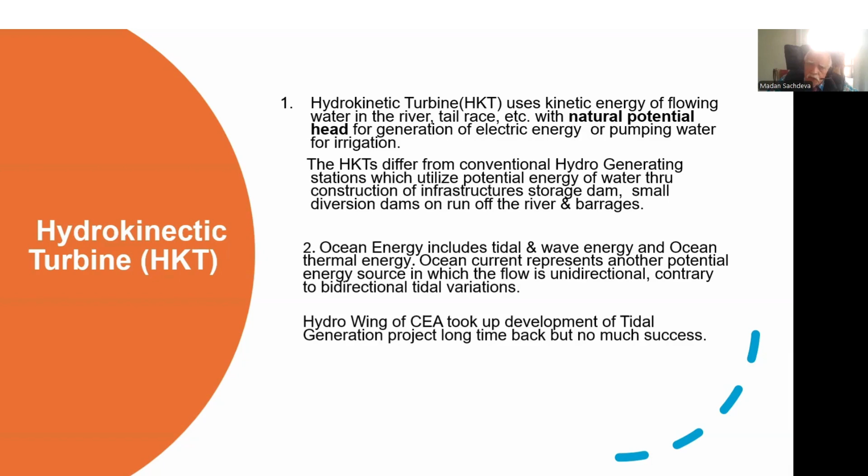Ocean energy includes tidal, wave energy and ocean thermal energy. Ocean current represents another potential energy source in which the flow is unidirectional, contrary to bidirectional tidal variation. The hydro wing of CEA took up development of a tidal generating project long back, but with no success.

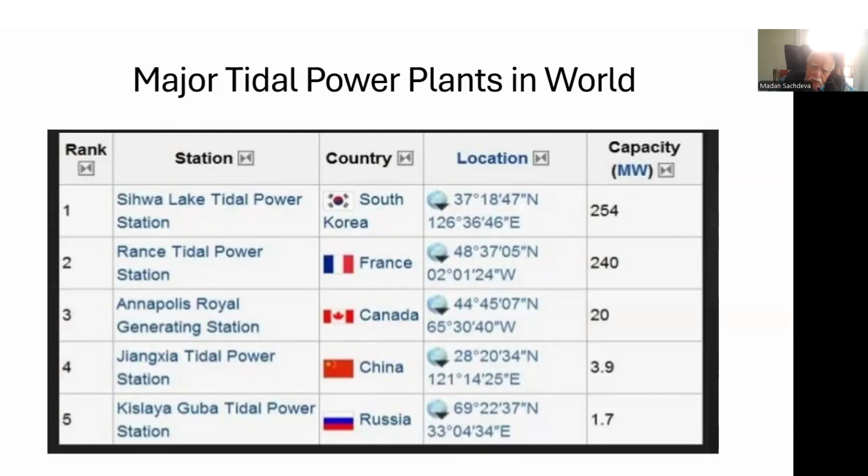This table shows the major tidal power plants in the world which are in operation. In South Korea, the capacity is 254 megawatt. In France, it is 240 megawatt. In Canada, it's 20 megawatt. In China, it's 3.9 megawatt. And Russia is 1.7 megawatt. There are many other cases, and now UK is trying to build the biggest tidal station for power in their islands.

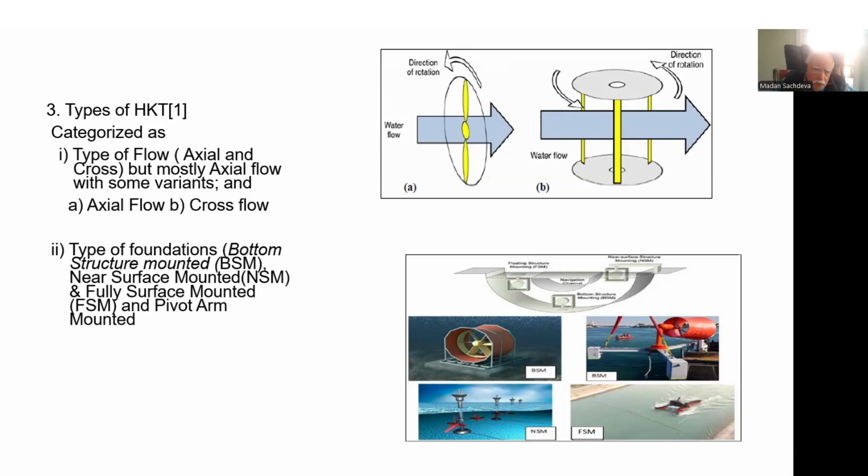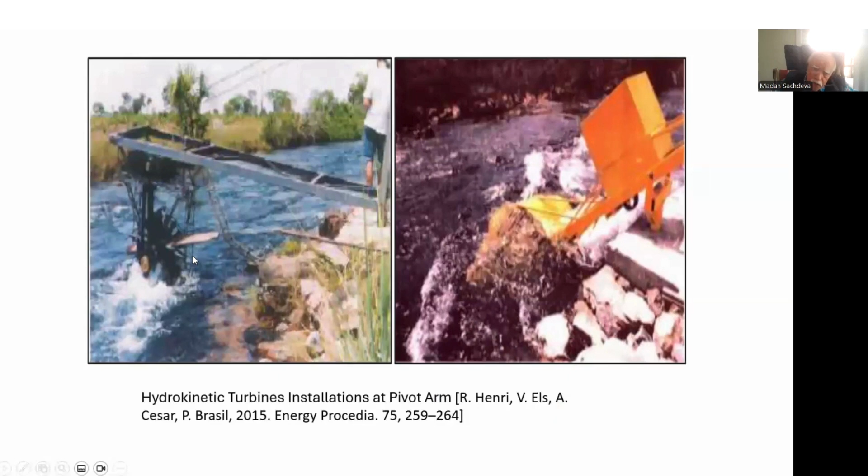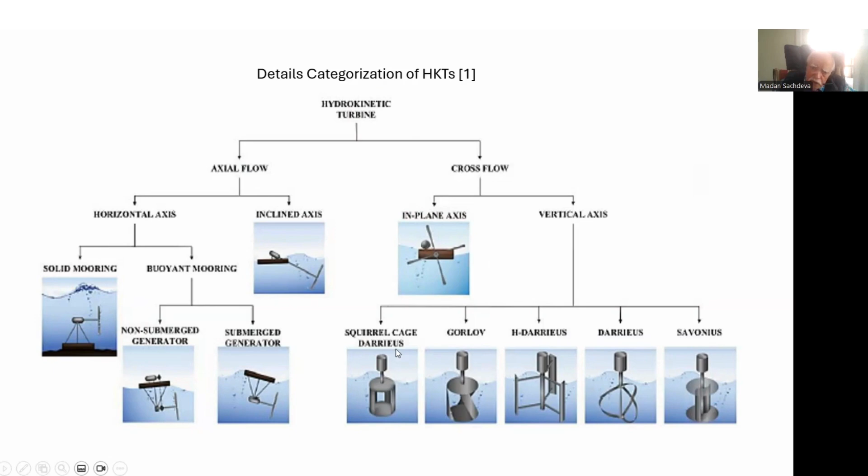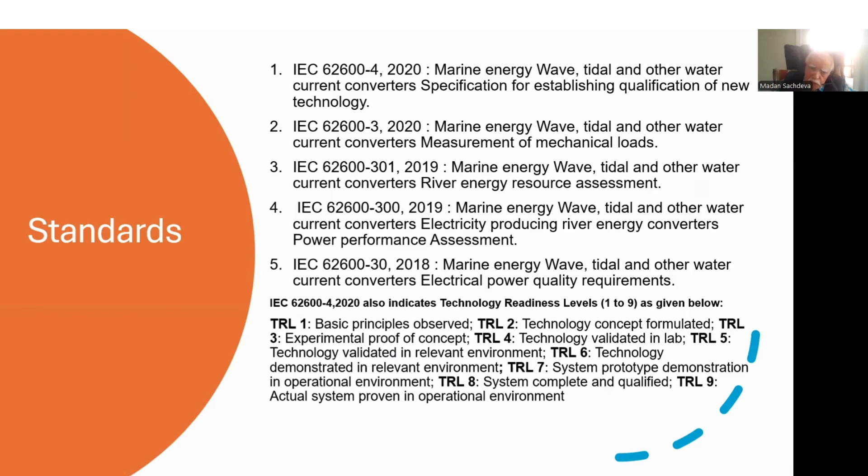Standards ruling the HKTS. There are 5 IEC standards, and one of them, IEC 62600-4 of 2020, in addition to specific requirements of the HKTS, also indicates the status of its present situation. The categorization is given from 1 to 9. 1 indicates basic principle observed, 8 indicates system complete and qualified, and 9 indicates actual system proven in the operational environment.

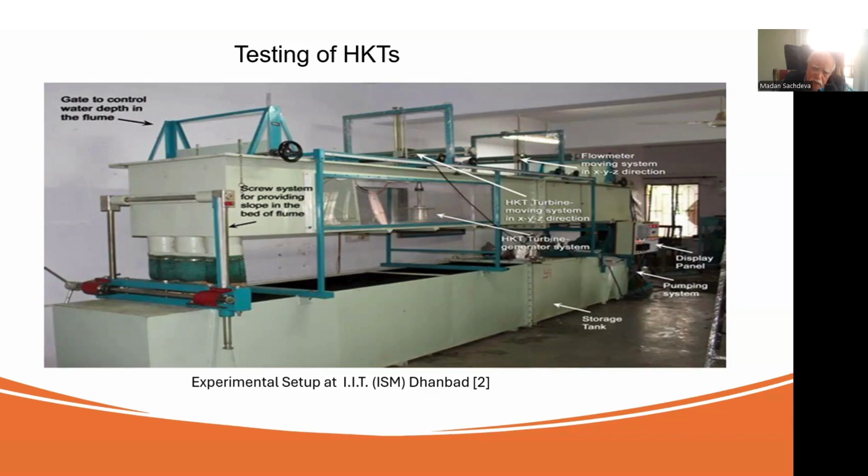This figure shows the testing of HKTS. This is an experimental setup in IIT Dhanbad. The reference is from the IIT International Conference conducted in 2019. On the left of the figure you see gates to control water depth and volumes. So by changing the quantity of water, you can change the speed, you can change the power of the HKTS and check the rating.

Development of surface hydrokinetic turbine technology in India. CEA issued a publication in October 22, which recognized indigenously developed surface hydrokinetic turbine technology under the hydro category. There are 2 manufacturers of SHKTs in India. One is Messrs. Maclec Technical Project Laboratory, New Delhi. They developed it on their own without anybody's guidance or partnership. They claim their turbines are rated TRL9.

Second is Messrs. IMP Power, Mumbai, in co-partnership with Messrs. Smart Hydropower, Germany. Its achievement is TRL8. Installations in India: Chilla Power Channel, axial flow 25 kW, Dehradun, Uttarakhand; Neyveli Lignite Corporation, Chennai, TN, axial flow 4 into 5 kW, supplier IMP; and Kakkad HEP, axial flow 5 into 5 kW in the tailrace of a 50 megawatt HE project, Kerala. For more details, refer to the CEA publication.

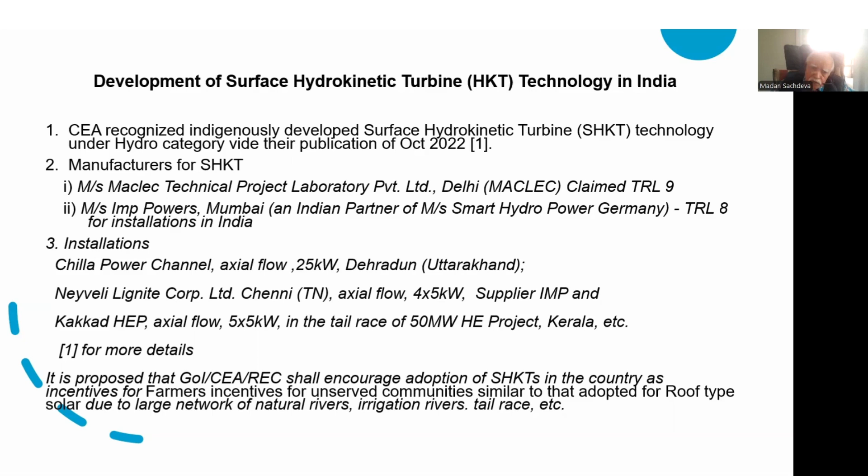It is also proposed that since HKTS has been considered a renewable source of energy, the Government of India, CEA and REC shall ensure and encourage adoption of SHKT in the country, as incentives for farmers and unserved communities, similar to that adopted for rooftop solar, due to the large network of natural rivers, irrigation canals, small streams, etc.

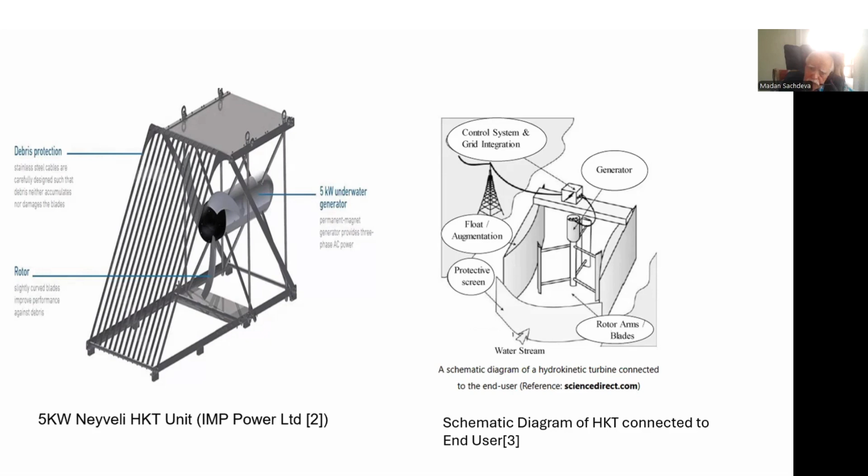This figure shows on the left the section of a 5 kilowatt HKT unit supplied by IMP Power Limited, and the one on the right shows the schematic diagram of the HKT connected to the end user. You will find there are floats on the left and right to augment the supply of water. Then there's a protective screen from the water stream. Then there's a rotor arm inside, which rotates with the water, then the generator, and then it's connected to the power system.

Installation of HKT in foreign countries. Since 2013, more than 300 projects have been developed by 280 different companies. Most of them are axial flow turbines. Among the biggest companies, 194 are USA based, 45 in UK, 19 in Australia, and 19 in Canada. And in European countries, 8 are in Ireland and 6 in Denmark. Some of the manufacturers are Guinard Energies, Ocean Renewable Power Company, Verdant Power, and Marine Current Turbines.

Alaska carried out a study for off-grid power from glacier canals with the upper layer frozen and flowing water below. A study in the Tanana River revealed perennial renewable energy of 1100 terawatt hours annually, by the lead research University of Alaska Fairbanks, then the Alaska Center for Excellence in Partnership, testing in the Tanana River, and a pilot project to demonstrate the feasibility and effectiveness of the hydrokinetic system in the community. This would avoid pollution due to running of diesel engines for meeting energy requirements.

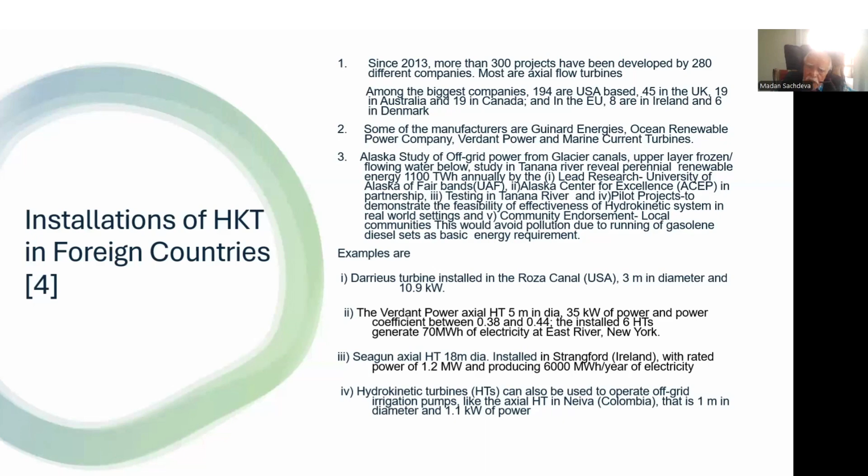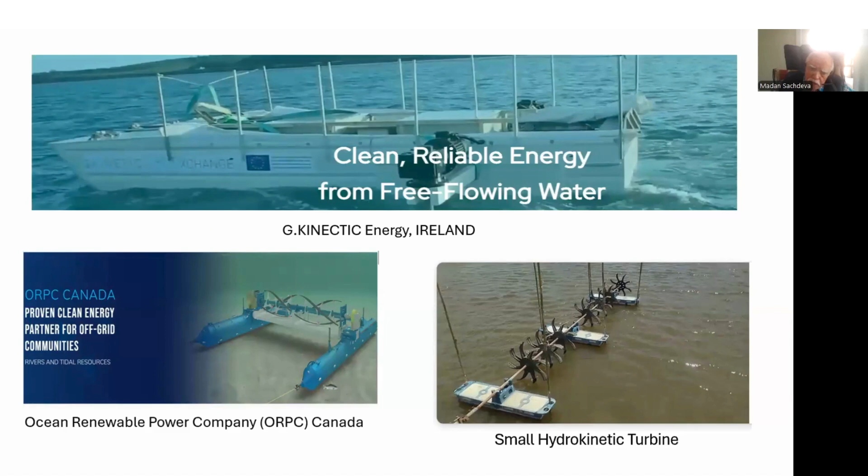Hydrokinetic turbines can also be used to operate off-grid irrigation pumps like the axial HKT in Neiva, Colombia. That is 1 meter in diameter and 1 kilowatt. This shows some of the figures of the turbines: the top one is of G Kinetic Energy Ireland, on the bottom left is the Ocean Renewable Power Company, Canada, and on the extreme right, the small hydrokinetic turbine in USA.

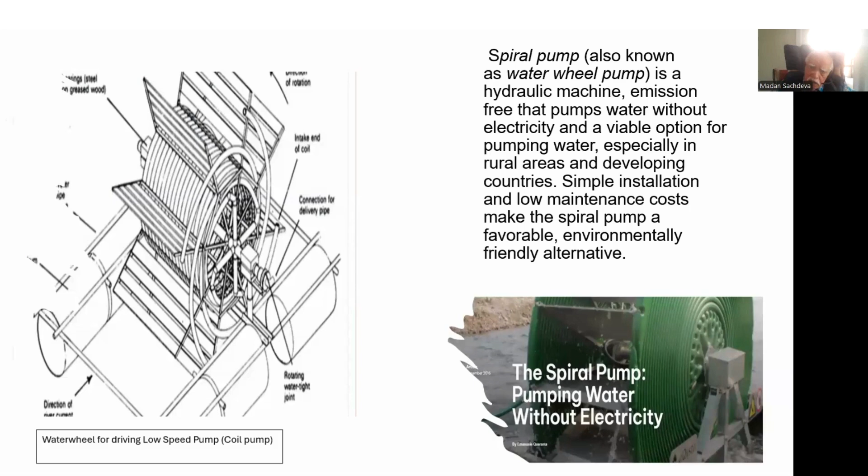Then on the left and under this, there is a simple spiral pump, which is equivalent to a water wheel pump and is used as a turbine for emission-free pumping of water without electricity, a viable option for pumping water, especially in rural areas and developing countries. Simple construction and low maintenance costs make this spiral pump a favorable, environmentally friendly alternative.

Energy calculation in SHKT methods. There are two methods. One is CEA and another one is the German-Thropton turbine. The basic formula of the energy is the same in both cases, which is P theoretical = ½ ρ A V³, where ρ is the density of water, A is the swept area of the rotor, and V is the flow velocity. Cp is the power coefficient, which converts the kinetic energy into the power captured. Cp can be taken from the curves given below, on the left side for the HKTs and on the right side for the windmill.

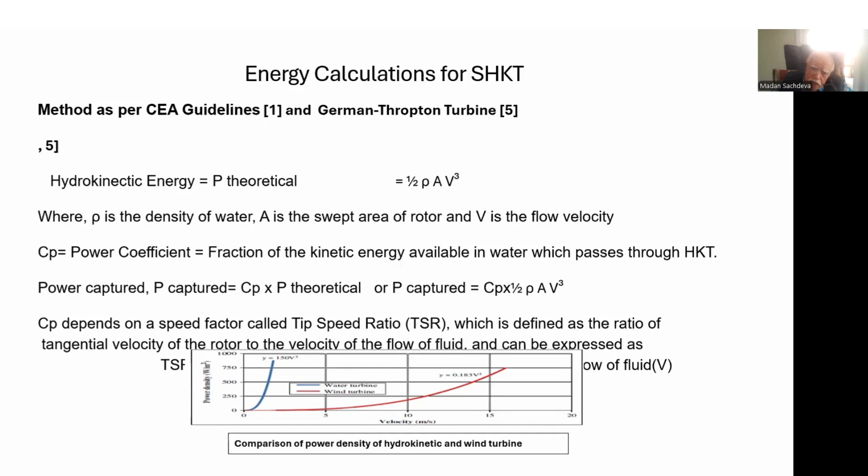German-Thropton turbine. Kinetic energy flux follows the same formula, where ρ is water density, which is 1000 kg per meter cube, A is the flow area intercepted by the turbine, and V is free stream velocity, which is taken as 0.5 meter per second, which is very small, little kinetic energy. Power density, when calculated by putting 1 meter area, gives 62.5 watt per meter square. Fully immersed would intercept 62.5 into 2.55, equal to 159 watts of kinetic energy.

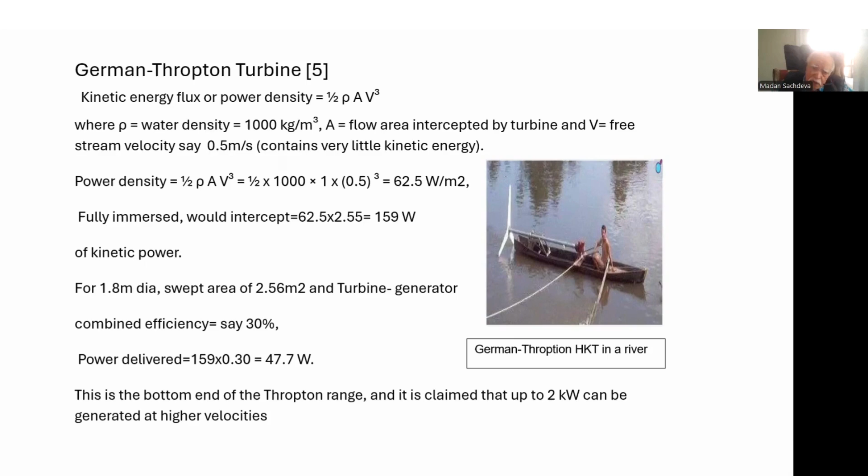For 1.8 meter diameter, swept area 2.56 meter square and turbine generator combined efficiency of 30%. Like in the previous case, Cp curves are there. Here the assumption is made as 30%. Power delivered is equal to 47.7 watts. This is the bottom end of the range, and it is claimed that up to 2 kilowatt can be generated at higher velocities.

Take home. With India's renewable energy goals and the global push for the net zero mission, SHKT is an eco-friendly and economically viable energy generation technology. CEA issued a publication in October 2022 in recognition of SHKT for India's extensive network of water bodies, including canals, rivers, and hydropower tail race channels. Energy calculation proposed for SHKT is listed as per CEA, with an example of the German turbine. Hydrokinetic turbines, mostly axial flow, are already adopted in different countries: USA, UK, Australia, Canada, Ireland, Denmark, and some in India.

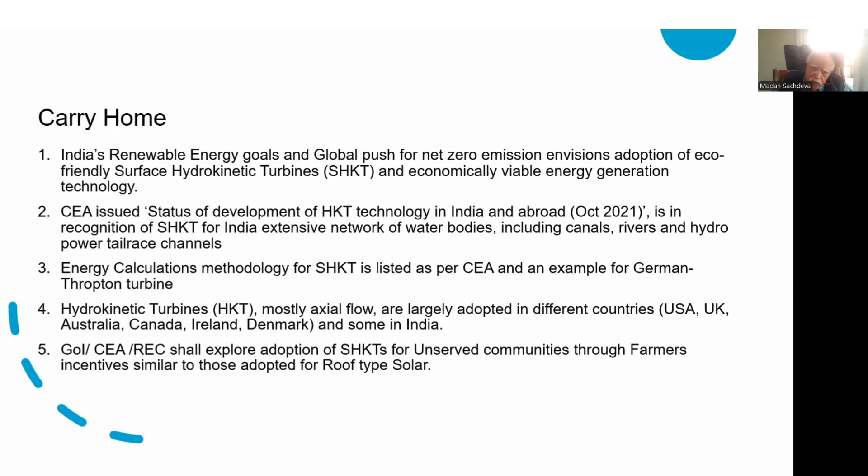GOI, CEA, REC shall explore adoption of SHKTs for farmers with incentives similar to those adopted for rooftop solar.